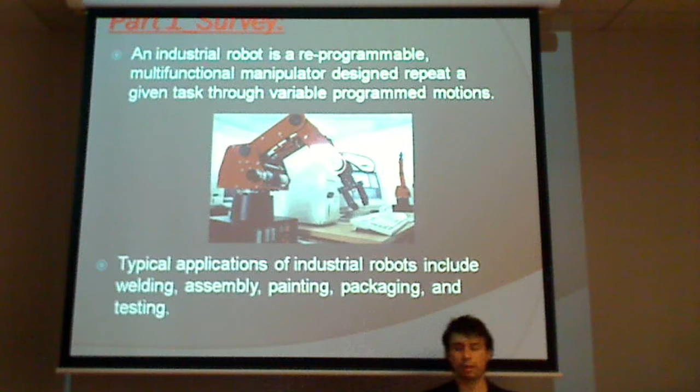For the first part, I'll be talking to you a little bit about the survey. An industrial robot is a reprogrammable multifunctional manipulator designed to repeat a given task through variable program motions. Typical applications of industrial robots include welding, assembly, painting, packaging, and testing.

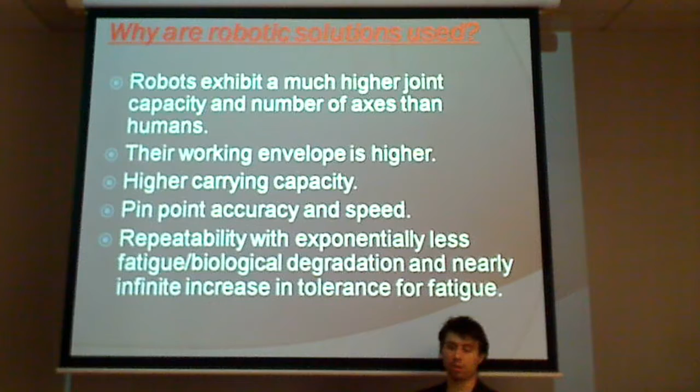Why are robotic solutions used? They're used because robots exhibit a much higher joint capacity and number of axes than humans. Their working envelope is higher, they have greater carry capacity, pinpoint accuracy and speed. They have repeatability with exponentially less fatigue and biological degradation, and nearly an infinite increase in tolerance for fatigue.

A little background about robotics. George Devol applied for the first robotics patent in 1954. He is considered by many to be the father of robotics since he created the first industrial robot. The first industrial robot was called Unimate. It was made in his company called Unimation, which he co-founded with Joseph F. Engelberger in 1956.

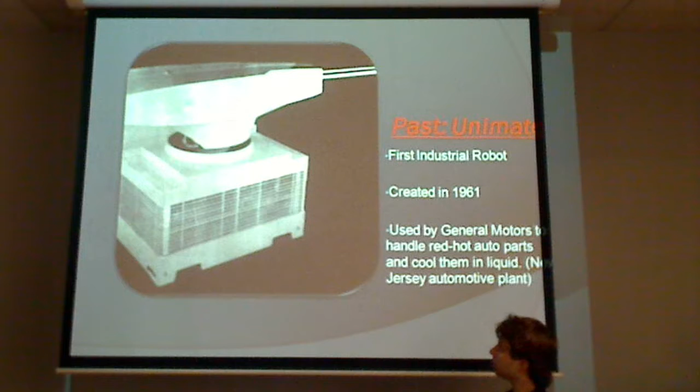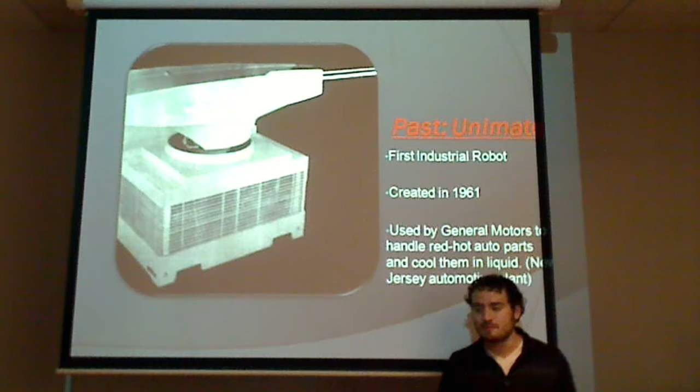Now, Rodrigo will explain to you a little bit about this robot. Like Andres was saying, this is the first robot ever created, the Unimate. It was created in 1961, and it was mainly used for quenching in the automobile industry.

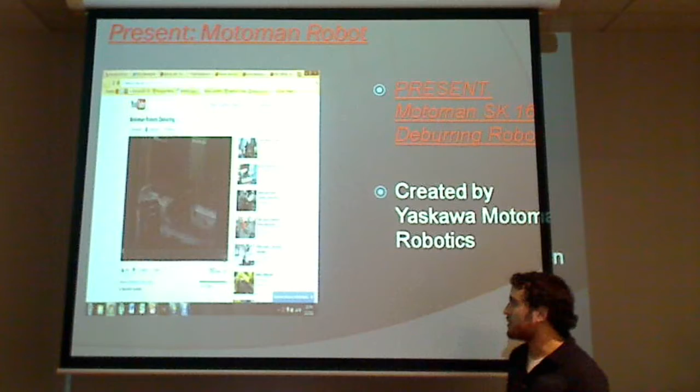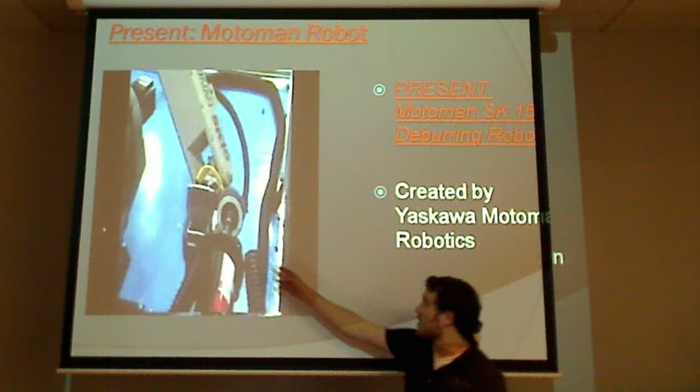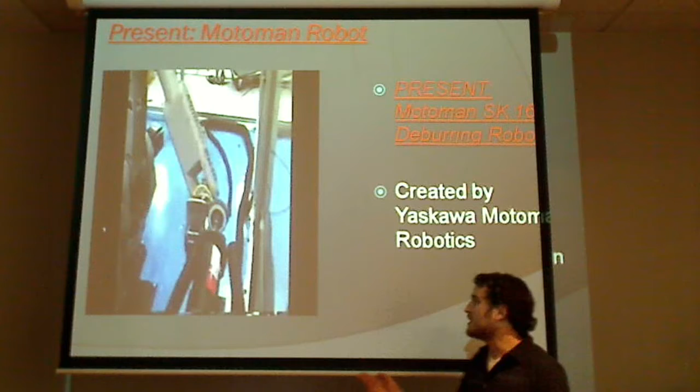Right now, for the present, this is mainly what it's used for. It's a 6-axis robot which is holding the piece to be deburred, and you have the deburring tool, as you can see right here, and the robot moves around it, deburring the necessary edges. This specific model is the SK16, and it is created by Yaskawa Motoman Robotics.

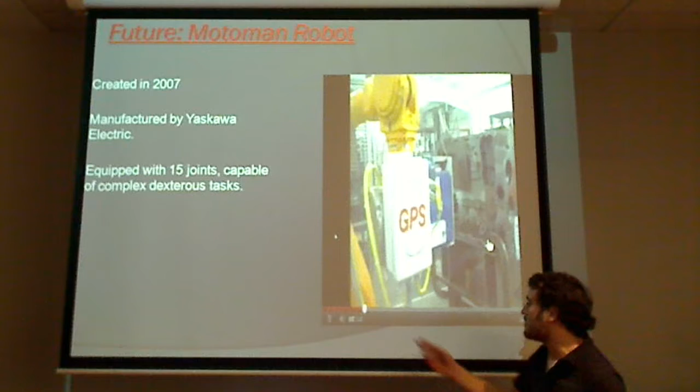Now, for the future, what it's aimed at is actually making the part to be rendered in a 3D program. Then you feed it into a computer that will tell the robot where it has to move, as you can see in this video right here. This particular robot has 15 joints, and as well as the previous robot, it was made by the Yaskawa company.

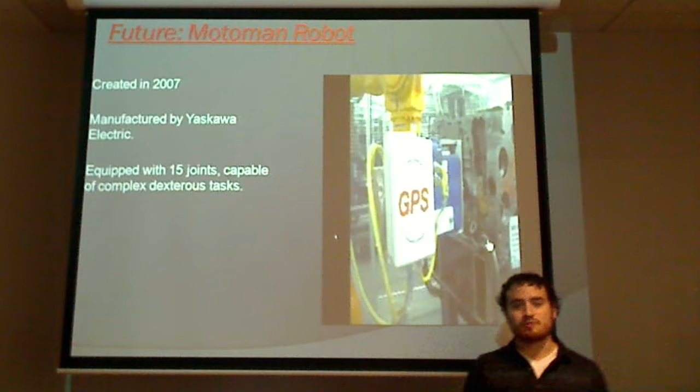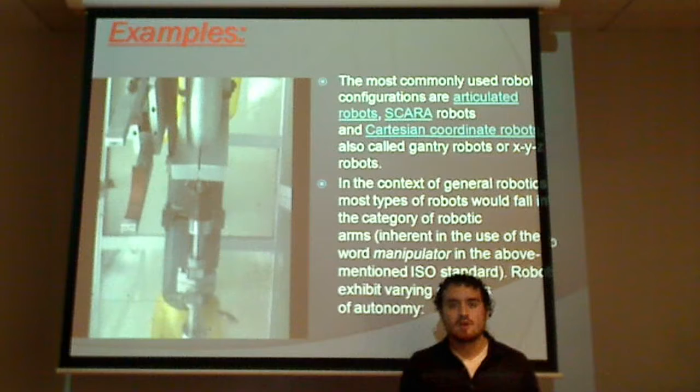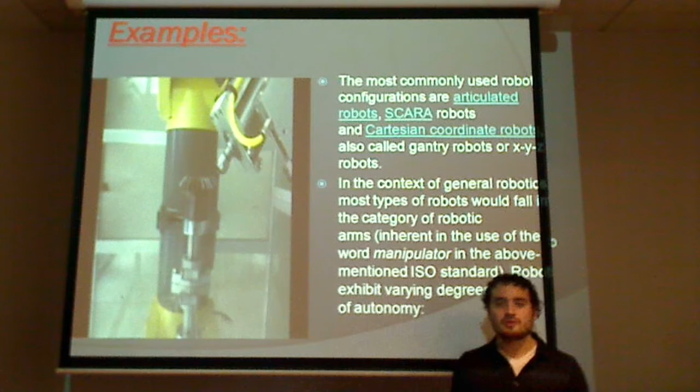And here is another example that we have here. The robot is grinding a gear, as you can see in the image. And in industry, the most common types of robots used are the SCARA and the Cartesian, and this is due to the fact that they can move in a 3-dimensional manner instead of a 2-dimensional manner, and most applications these days are in 3 dimensions. Another reason is the work envelope is large and very flexible. You can do a variety of things with it.

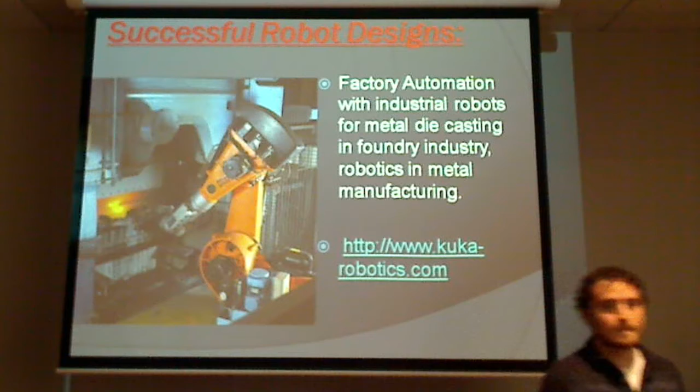And now here's Oliver to talk to you a little bit more about robots. So another successful robot design is seen here. This is factory automation for industrial robots. This type of robot is found in foundry installations for metal manufacturing.

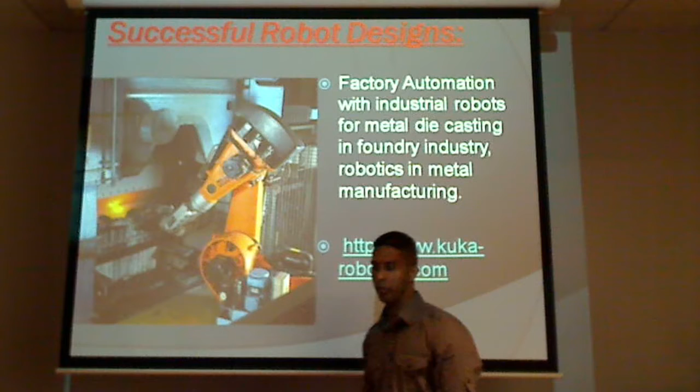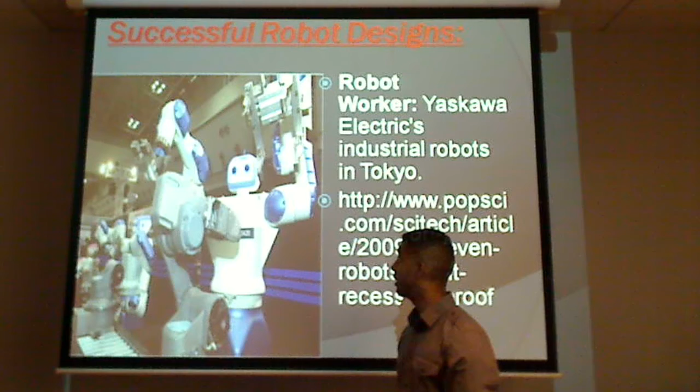And this robot is a robot worker. It's a humanoid type robot, and these robots are more like what you'll find in the future. They can perform a multitude of tasks, such as deburring, because of their many joints and their flexibility.

In summary, future robotics. In the future, larger, integrated, smarter robots may replace the numerous models used today, improving efficiency, cost, and more sophisticated end effectors, and advanced image recognition software coupled with artificial intelligence.

Now we have Rodrigo to introduce you to our design project. So for our design project, we decided to do 2 tasks, which will be deburring a star-shaped and an I-beam shape out of material. Now, we had 3 designs that we could use. The first one being the 3R robot, then we have the PRP robot, and then we have the PRR robot.

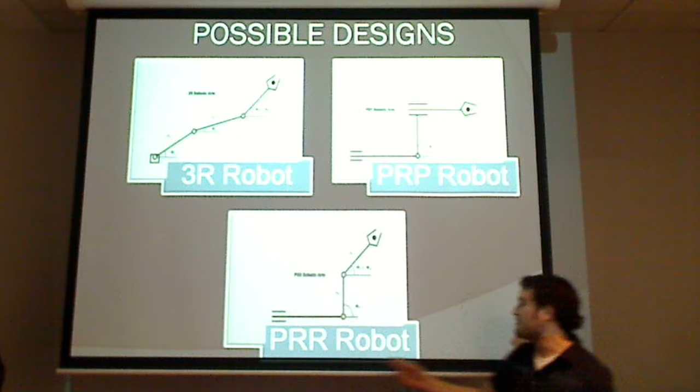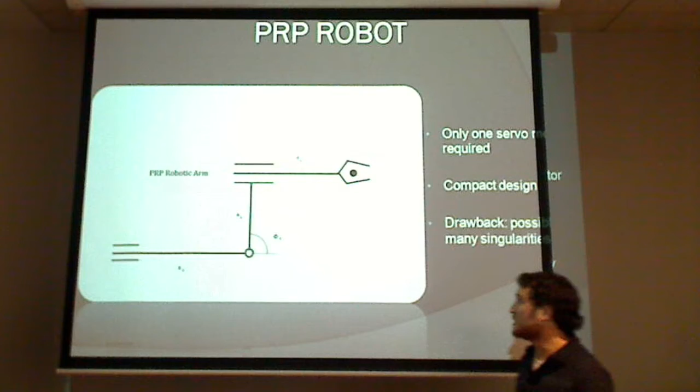The first one that we looked at was the PRP robot, and we decided not to use this one due to it not being very flexible, and it caused a lot of singularity points for our application. The second one that we looked at was the PRR robot, which is a little more flexible than the previous one that we just showed, but it still had a few problems with singularity points.

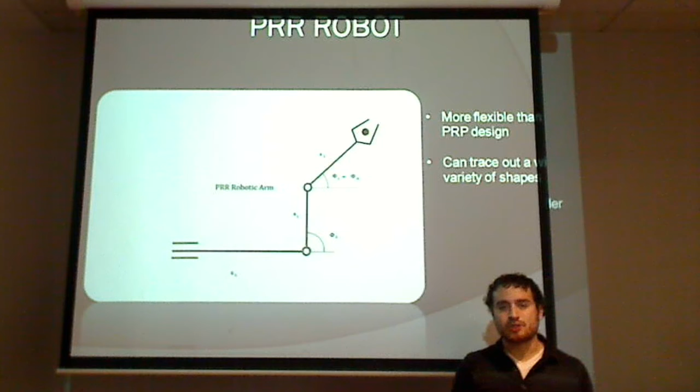So that's why we decided to go with the 3R robot. It's the most flexible out of the three. The only drawback is that it's very large, so you will need a very large work area. The good thing about this robot is it's very flexible, like I just mentioned, and its work envelope is very large, which allows it to do a variety of applications.

And now Oliver's going to talk to you a little bit more about our application.

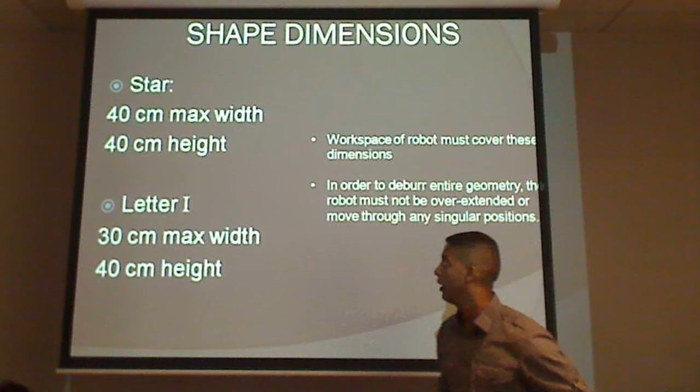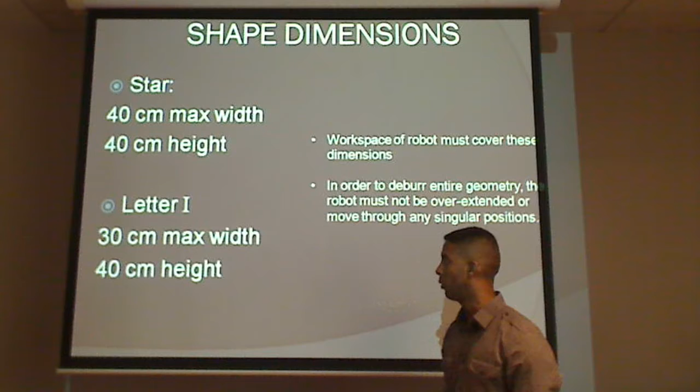So for the shapes that we chose, the star and letter I, we had dimensions as follows. The max width for the star was 40 centimeters, the max height was also 40 centimeters. The max width for the letter I was 30 centimeters, and the max height was 40 centimeters. So given these dimensions, the robot would have to design a workspace large enough to trace out these paths in order to deburr the parts more effectively.

Our constant parameters here are the link lengths: 30 centimeters for A1, 2, and 3. We chose this because it seemed the most reasonable to reach our workspace. Really, we could have played with the link lengths more, but these were easier to work with.

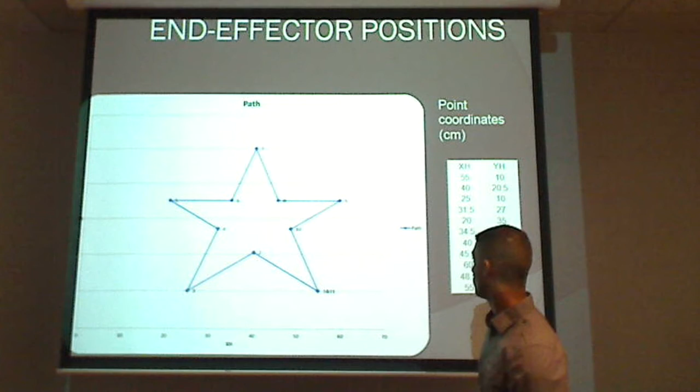So for the end effector path of the star, we have all the points indicated here, and that's the shape that the robot will trace out, deburring along all these edges to remove any sharp corners. And here are the X and Y coordinates of these points.

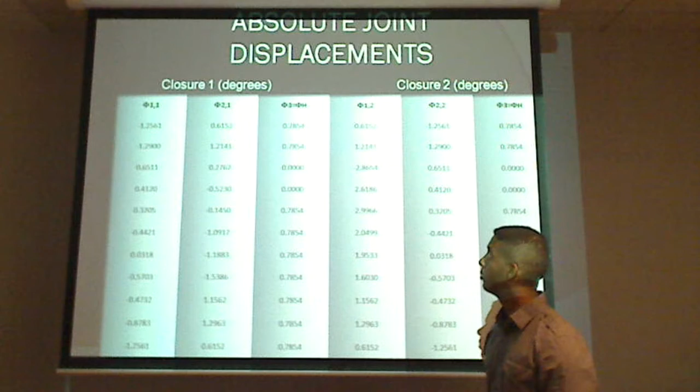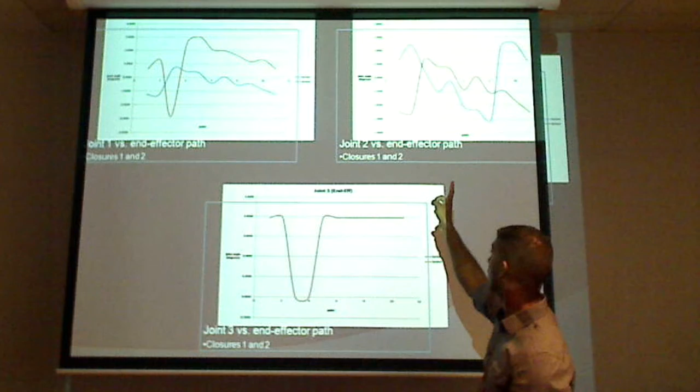Using Excel, we were able to do an inverse kinematic analysis to obtain the absolute joint displacements phi1, phi2, for both closures, closure 1 and 2. Here are the plots for these joint displacements. Up on the left we have joint 1, then joint 2, and this is joint 3. These are in respect to the end effector path. You can see both closures indicated on joint 1 and joint 2. Notice also no singularity points or positions.

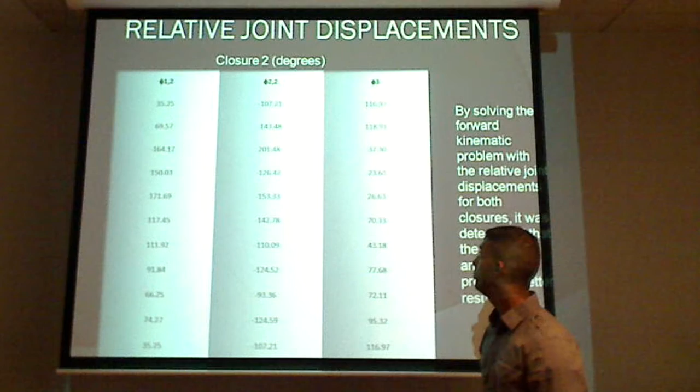Now here we obtained the relative joint displacements for phi1 and phi2. By solving the forward kinematic problem with respect to joint displacement, we were able to determine that closure 2 had better results for our robot, so we used that.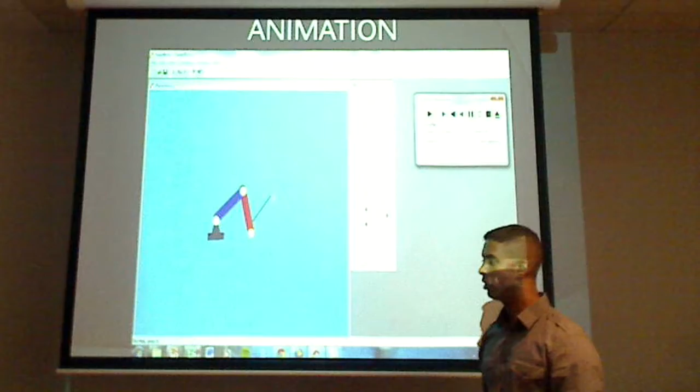Now I'll have Andreas here to talk to you about the next shape, which was the I shape.

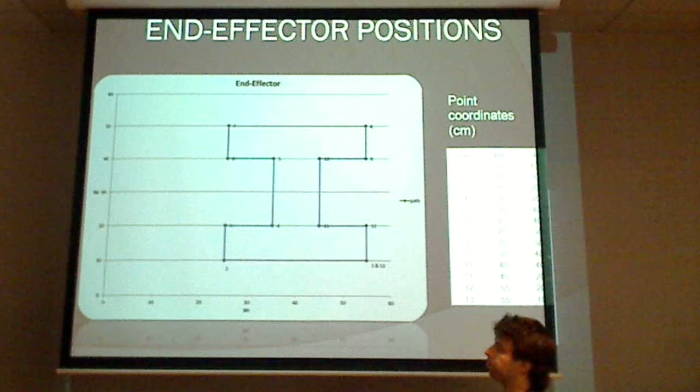So here we have the end effector positions for the I shape. The robot began at point position 1 and traced a symmetrical I-beam shape all around.

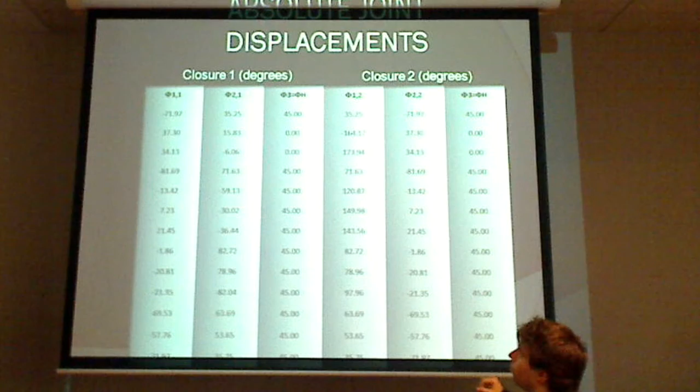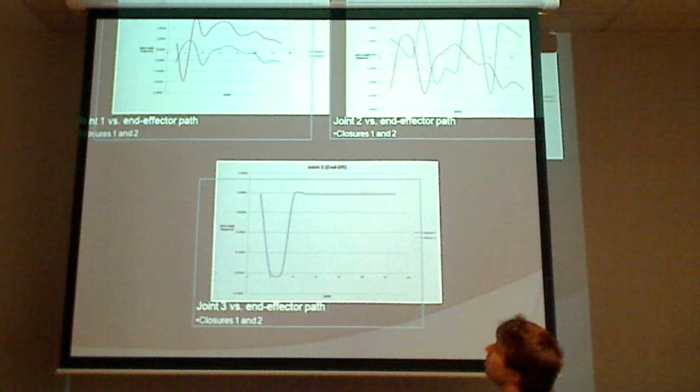Here we have the displacements, the absolute joint displacements for that shape, for closure 1 and closure 2. Here are the plots, the graphs, for joints 1, 2, and 3 versus the end effector path. As you can see, as is evident in all these plots, there were no singular positions.

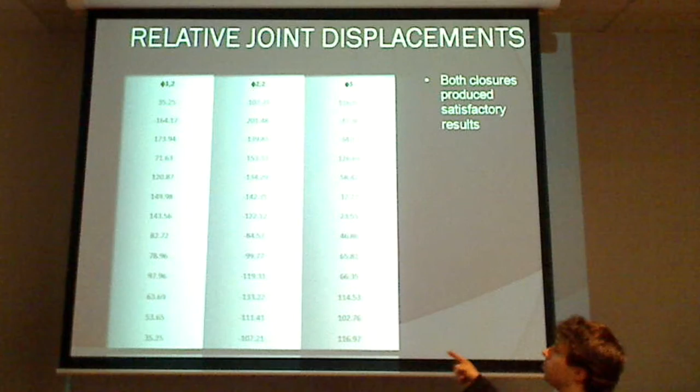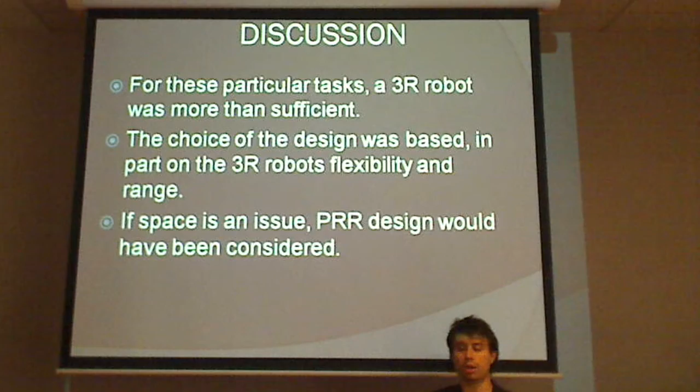In discussion, for these particular tasks, the 3R robot was more than sufficient. The choice of design was based in part on the 3R robot's flexibility and range. If space is an issue, however, a PRR design would have been considered.

In conclusion, within the given field of deburring automation, a wide range of robots and applications were studied. Jobs can vary, so adaptability of robots is essential. Given two tasks, a 3 degree of freedom robot was kinematically designed. The only drawback, however, is that only 2D planar geometries are possible.